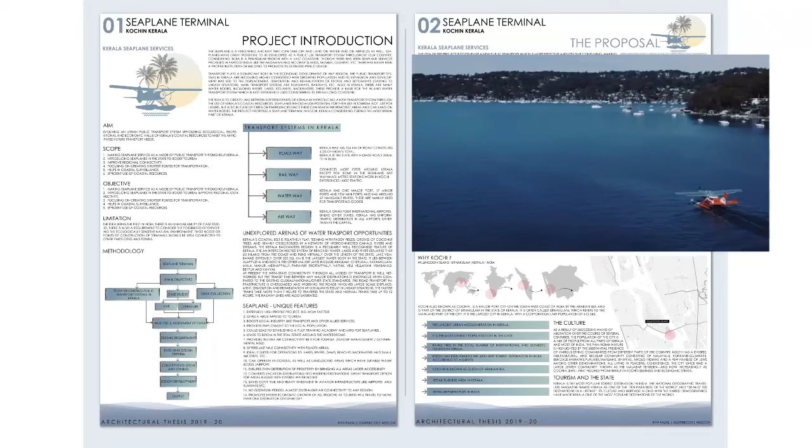Seaplanes are basically fixed-wing aircrafts that can take off and land both on water and airfields. Seaplanes have a great potential to be developed as a public use transport system throughout our country, considering India as a peninsular region with a vast coastline.

Though there has been seaplane services provided in parts of India like the Andaman Nicobar Islands, Mumbai, Gujarat, etc., there has never been a proper institution or a building to promote its extended public usage.

In today's world, transportation plays a significant role in the economic development of any region. The public transport systems in Kerala are becoming highly congested with growing population, and its expansion and development has led to the displacement, demolition and rehabilitation of a large number of peoples and settlements, leading to uneasy situations.

Although Kerala has a vast coastline of 596 kilometers stretch, it is not as much used for public transport systems. So the idea is to evolve a new public urban transport system using these coastal resources available in Kerala.

Introducing seaplanes in Kerala would improve the regional connectivity, boost tourism, and also could be used as air ambulances in emergency situations like in floods, and also there is an introduction to a faster mode of transport. This public-based transport system can also bring in a lot of employment opportunities towards the region.

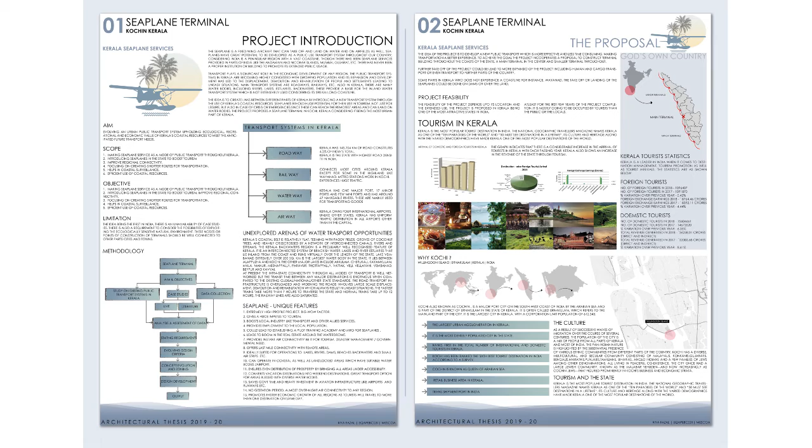These are some of the details of the case studies done for the project completion. These include some of the private company-owned flight operations in Kochi and Mumbai, and others like Velana Seaplane Terminal, which is the largest seaplane terminal in the world.

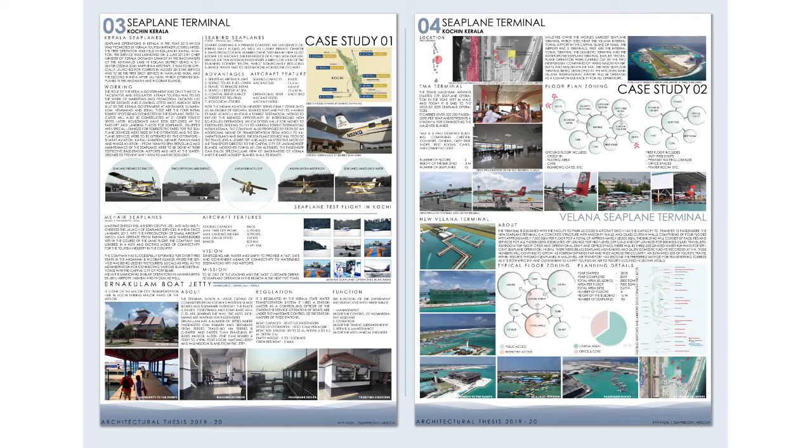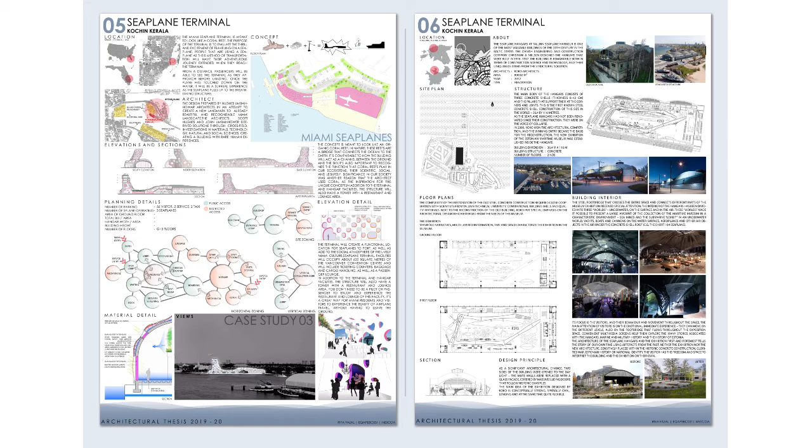The site for the seaplane terminal building is taken on the southernmost point of the Wellington Island in Kochi, Kerala. Selection of the site is dependent upon certain criteria such as area under the protected waters, depth of the seabed, maritime movements in the location, navigable airspaces, surrounding community, as well as the current flow, water level, wave heights of the water body.

The site offers an area of 56 acres of land which comes under the CRZ rule and which is used as a multi-use land currently.

The site also offers a close proximity to Cochin International Airport, Vyttila Mobility Hub, Ernakulam South Railway Station, Cochin Town, Cochin Port, and Kochi Metro. The site also offers suitable climate, water levels, and speeds which is required for seaplane operations.

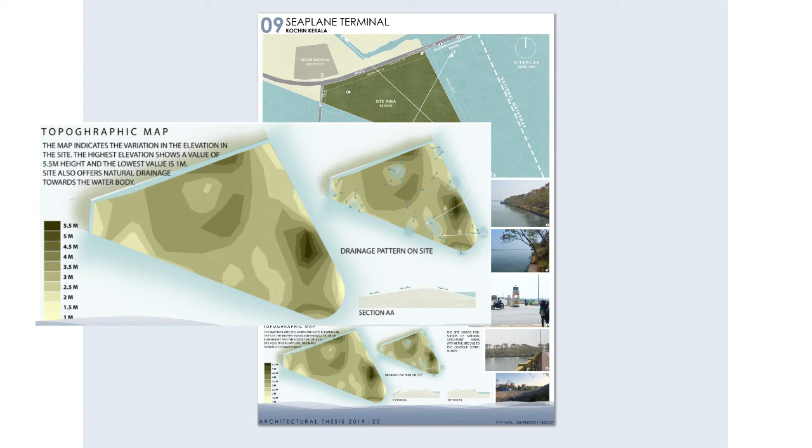The topography of the site is preferably flat and also provides a small deviation of natural drainage towards the water body. There are also small naturally formed catchment areas in the site which could be used as rainwater harvesting areas.

The concept for the terminal building is connective architecture, where architecture plays an important role in connecting land to water and also places. The figures portray the idea of moving outward, providing best accesses and connecting land towards water.

The building is zoned out partially on land and partially on water, which is connected through architecture. There are also provision for observatory building on the southernmost point, which gives great views towards the terminal as well as the sea lanes.

The observatory building could also be used as a viewing point for seaplane landing and takeoff.

The expanded vision of the concept portrays the terminal as a connector towards technology, transportation, society, economy, and environment. There are elevated cultural galleries within the terminal building to promote, educate, and entertain through cultural activities.

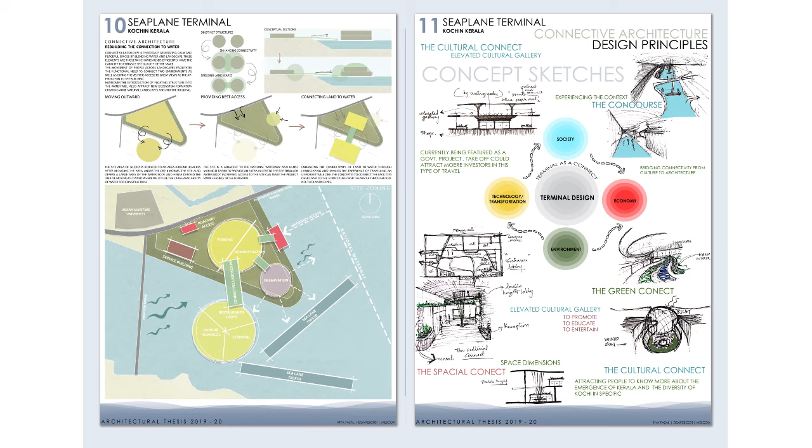The main entry and exit of the site is given at the rightmost end, and the service entry towards the site is given at the leftmost end.

There is a separate pedestrian entry and exit at the center of the site, and each of these entrances and exits has a security check.

The site is occupied with the terminal building at the center, an observatory at the rightmost end, a jetty terminal provided for access through national waterways, and a hangar building for repairing and parking of seaplanes, along with other service buildings.

There is also a public park provided at the center of the three main buildings situated in the site.

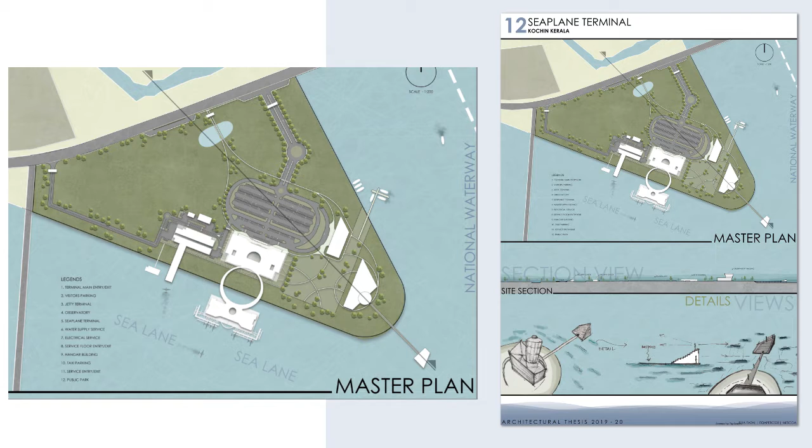The main terminal building is designed in 2 floors, where the ground floor is completely dedicated to departure and the first floor completely dedicated to arrival. Segregating the arrival and departure areas helps in better controlling of the traffic that arrives at the terminal per day.

The departure entry is situated on the left side of the terminal building, which moves through the baggage collection areas, reception areas, and reaches the security check area.

After the security check area, passengers could move through the open atrium spaces, which have certain utilities such as shops and cafes on either side.

These passengers then could move through the concourse area with elevated cultural galleries on either side, and then move towards the pedestrian bridge towards the floating terminal area.

The floating terminal also offers certain utilities and an open atrium space at the center. These passengers could then move to separate gates where they are departed towards the seaplanes.

The arrivals activity occurs on the rightmost end of the floating terminal. The passengers after arrival reach the arrival hall and then pass through the security check.

These passengers could then move towards the passenger bridge, which takes them towards the upper floor of the terminal building over land. The first floor of the terminal building on land provides areas for baggage collection and other utilities.

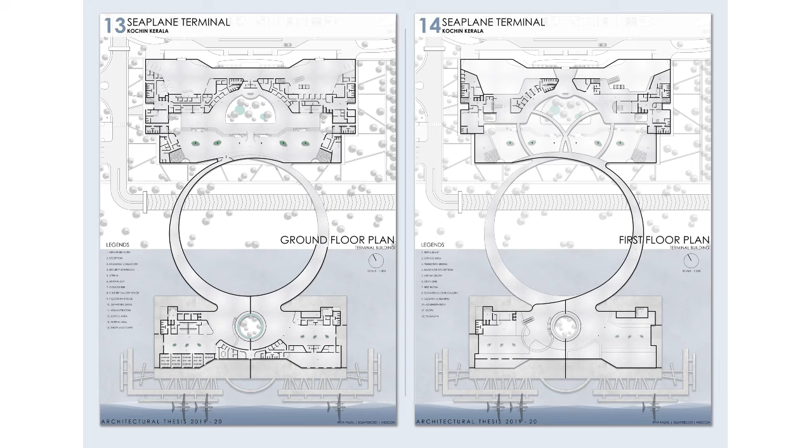The passengers could then move out of the building either through the stairs located inside or the one outside the terminal.

The west elevation shows the ramped way of the pedestrian connections from land towards water. The north elevation is the frontal elevation of the building, which shows its double-heighted glass facade.

The floating structure is a pontoon-type floating method where the structure stands over a hollow box to maintain the water levels.

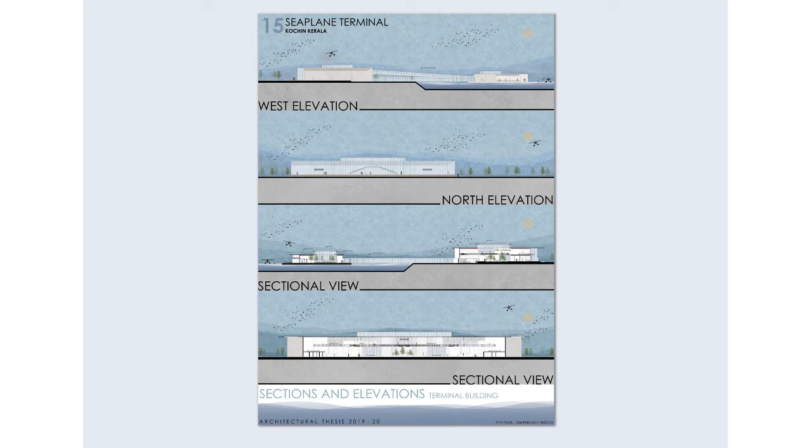The detailed plan shows the service areas provided within the building, such as travel management offices, staff lounges, administration offices, and customs offices on both arrival and departure ends.

There are also service areas such as building management offices, staff training areas, and pilot lounges, provided on the first floor of the building.

The first floor also offers amenities such as cafes, shops, restaurants, and a spa, which are used by the arriving passengers.

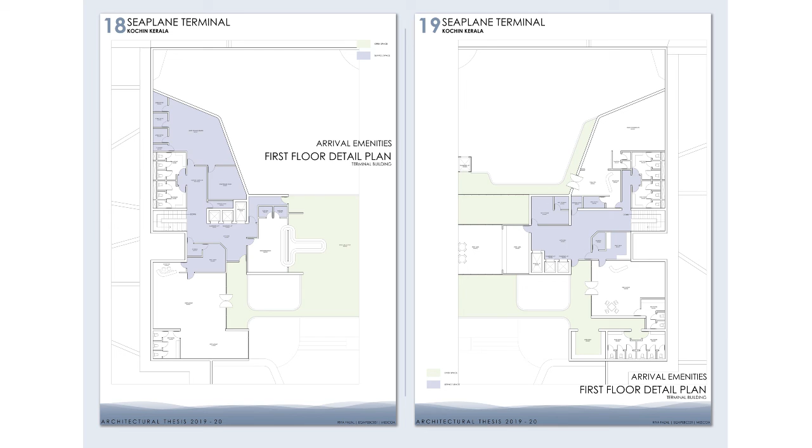The hangar building is where the repairing, fueling, and parking of the seaplane occurs. The building offers fuel storage, a delivery room, baggage handling units, repairing and storage areas, and lounges for employees.

The building also has a separate entry for emergency access for airlifts or air ambulance purposes.

The observatory is a 5-story building with a 2-story base building and a 3-story tower. The base building is occupied with auditoriums, observing areas, restaurants, shops, and other administration offices.

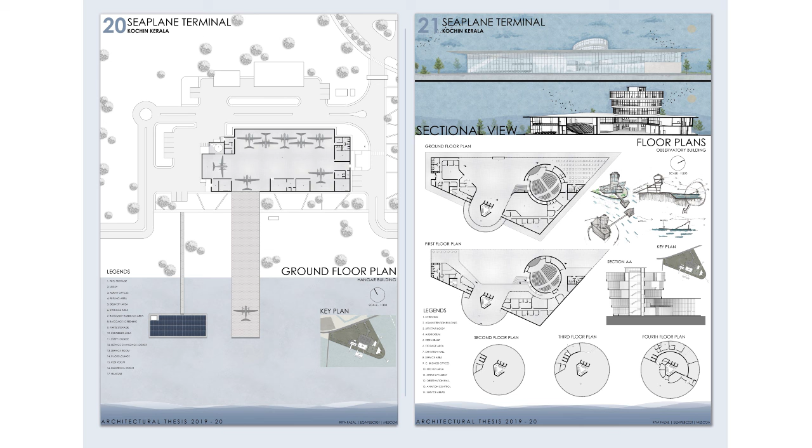The topmost floor of the tower is completely occupied for the aviation controlling office and is not accessible to the public.